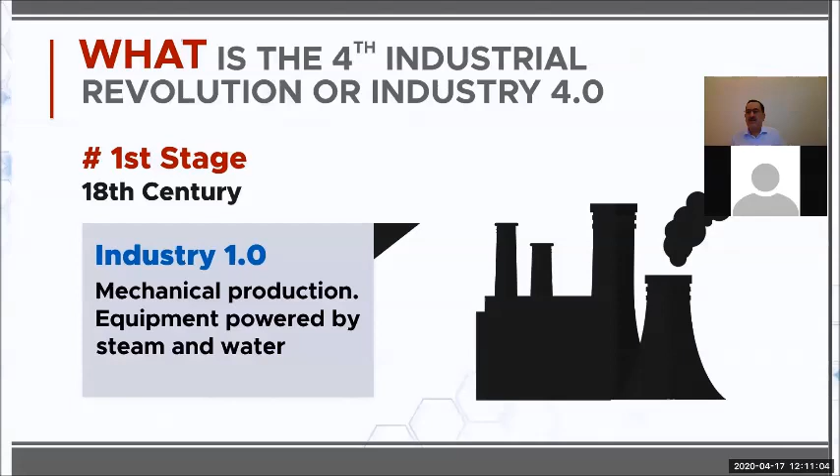The second industrial revolution happened more than 100 years ago, around the turn of the last century. So, this was the revolution which was brought about by electric power, the easy availability of electric power, which led to mushrooming of factories across the countries, first in Europe, then America, and then slowly to other parts of the world, and also led to the invention of such techniques like assembly lines, which was first used extensively by Henry Ford to make automotive manufacturing more efficient and cheaper.

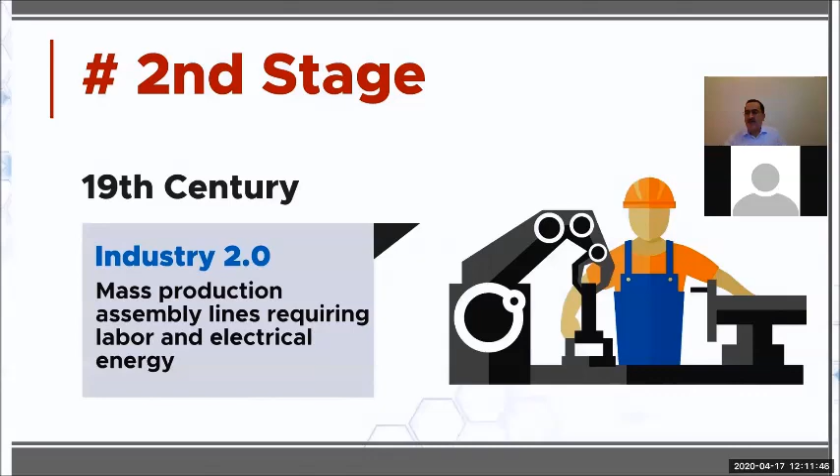The third industrial revolution took place about between 1967 and 1970, when you had a fusion of mechanical engineering technology and electronics. So basically, electronics entered machines in the form of chips, PLCs, simple NC systems, and finally CNC. In 99% of factories of the world, we are still in the third industrial revolution, some variant of that. So if you have a factory in Manesar, which is using 50 machining centers and 5 axis, 7 axis machining, you would say that this is a form of Industry 3.11. By 11, I mean 11th iteration or improvement over the basic thing which emerged in 1970. But it is not Industry 4.

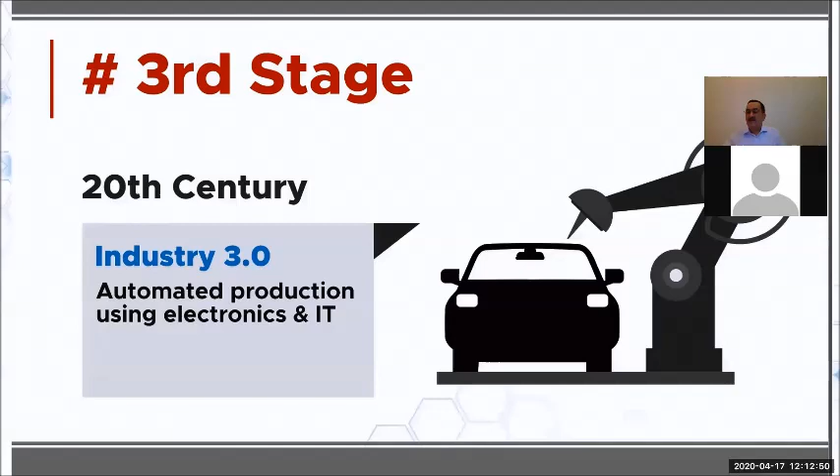Thanks to IoT devices becoming cheaper and more easily available, we were able to now start Industry 4.0, or the fourth industrial revolution. So fourth industrial revolution is basically a combination of machines and IoT devices and cloud-based storage to pick up data seamlessly from factories around the world, take it to the cloud, crunch that data with software, and deliver reports, alerts, and actions, remote actions. So this is an entirely new way of working.

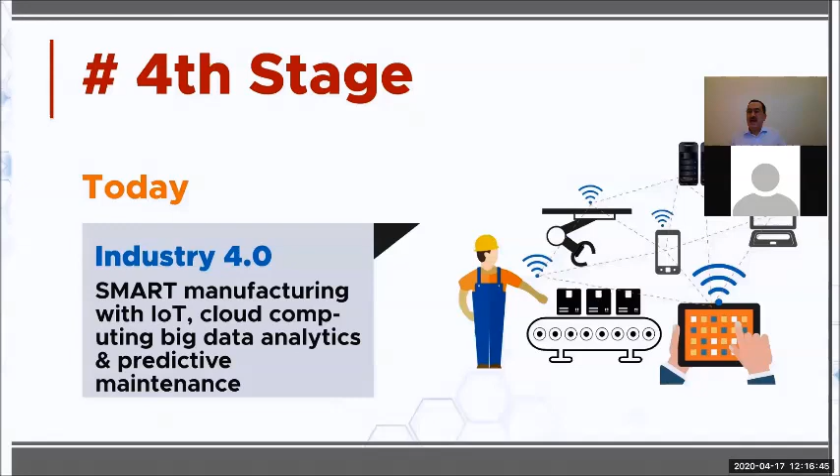So these three reasons are why the fourth industrial revolution has happened, and which is why I want to focus on these topics.

Now, what is a low hanging fruit? You must be thinking, why am I talking about fruits. A low hanging fruit, as you can imagine, you go to an orchard or walk in the forest. There are some fruits which are very high up on trees. It's very difficult to reach them, you can get hurt, and maybe you reach that fruit and find it's not ripe, so all that effort is wasted.

In comparison, a low hanging fruit is one you can just raise your arm and pluck, like an apple from a tree, and enjoy it. So when we think about business, a low hanging fruit means technologies which are easily accessible, affordable, and implementable without experts.

One of the most important criteria for success of any initiative in industry is that you should be able to do it yourself. You should not need very highly skilled people inside your company, or experts from outside coming to give you advice. So this is the basic meaning of low hanging fruit.

The first low hanging fruit is something I call UMM, Universal Machine Monitoring. What is the meaning of universal machine monitoring? Universal means something applicable to everything. So this technology is applicable to all kinds of machines: CNC, non-CNC, turning centers, drilling machines, forging machines, presses, anything, any kind of machine tool.

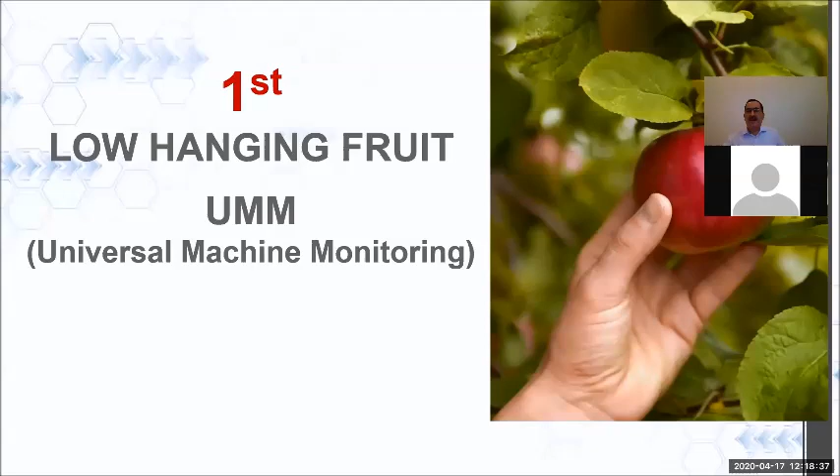Now, the core technology behind UMM is cloud-based. It depends on a black box which is plugged into a machine, and it picks up the data from the machine and sends it to the cloud. It's a secure cloud, there's absolutely no risk. The software sits in the cloud, crunches this data, and delivers it to the stakeholders in the factory.

Two kinds of information are delivered: one is called alerts, which come to the people on the shop floor. The second is called reports, which is something periodic, meaning hourly, shift by shift, or daily.

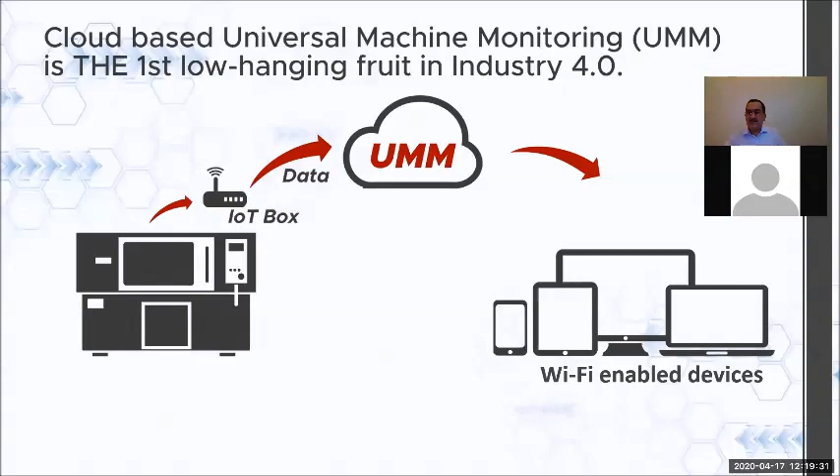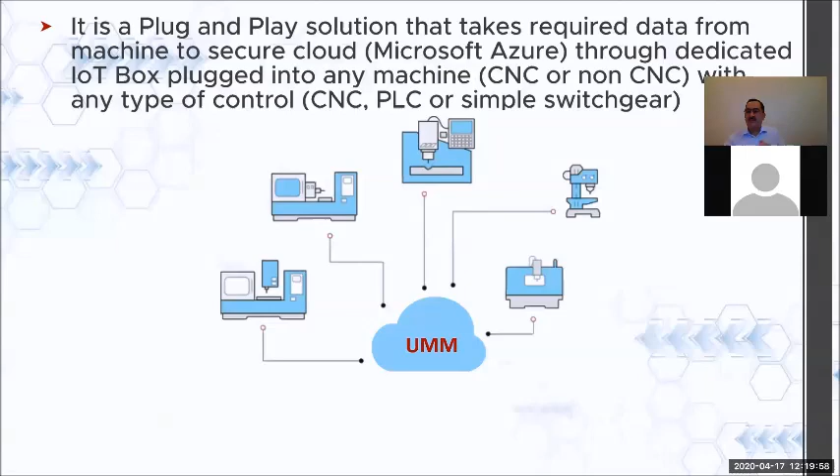Now, this is a plug and play solution which does not need any IT infrastructure. You don't need LAN cables, servers, UPS, or any of those things. As you can see from this graphic, all kinds of machines, your old lathes, drilling machines, welding machines, bar cutting machines, anything can be fitted to this network.

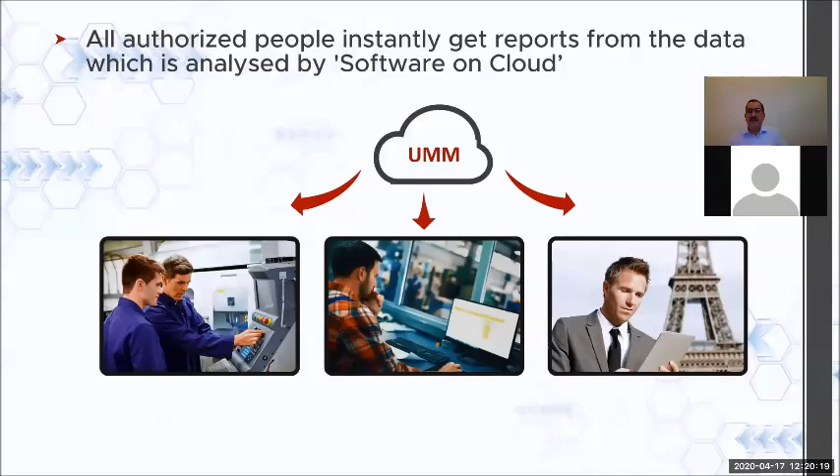The data crunched about the performance of the machines is available to people on the shop floor, to your managers sitting in their cabins, and also to your plant head or MD who may be somewhere else in the world. Even if he's out of the country, he can access that data in real time.

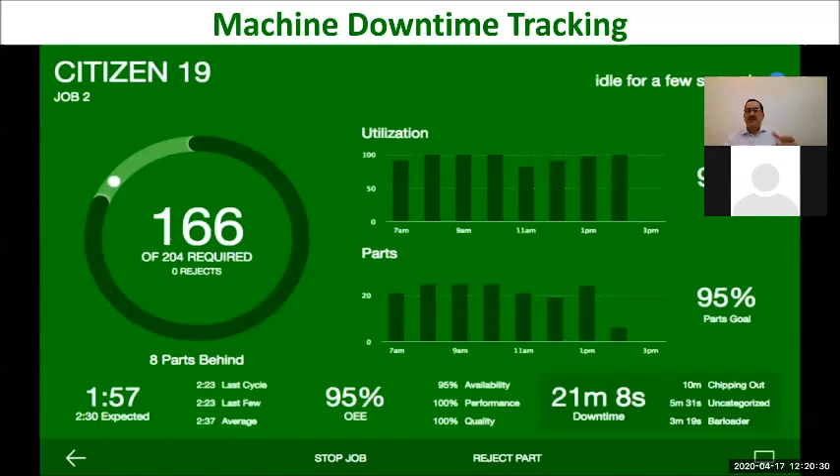Now, these are some examples of reports you can see, including downtime tracking: how long the machine has been working, when it stopped, how long it stopped, and why it stopped. You can also have screens with alerts. So if you have a machine shop with 100 machines, you can install screens in the cabins of supervisors where they can see the data coming in real time.

They can know which machines have been down, for how long they have been down, so that they can monitor and make things efficient in real time. The most important reason for having UMM is to monitor the productivity of the machine.

The measure of productivity is something called OEE, overall equipment efficiency. Overall equipment efficiency depends on the availability of the machine, which means the machine should not be down because of tool change, job change, power cut, or maintenance.

It also depends on P, the performance of the operator—that okay, machine is available, but the operator is not loading fast enough, or in between he is stopping and chatting with somebody, or he has gone for a lunch break of 30 minutes, but comes after 40 minutes.

Or 15 or 20 minutes before the end of the shift, he switches off the machine. So all this, as you can see from this graphic, is recorded in more than 24 types of reports. It's your choice what you want to see. And seeing these reports, you can know which machines are creating maximum problems in terms of poor performance.

Which you get with the help of these reports. So the second low-hanging fruit is called PDM, or predictive maintenance. This is a very, very powerful technology. It is still in its infancy, which means it is still undergoing a lot of development, as is the case with a lot of other Industry 4.0 technologies.

They are all evolving. It's not like a finished package. It is something which is available now in a certain version with certain features, and then these get evolved further.

Now, all of us are familiar with two types of maintenance. The first original type of maintenance we are all familiar with, ever since gadgets, appliances, or automobiles started coming into our lives, is breakdown maintenance.

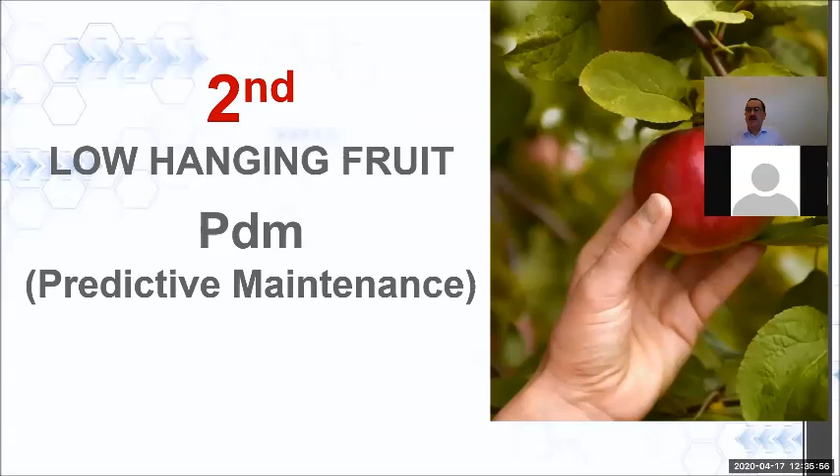So we now have this new technology, an Industry 4.0 technology called predictive maintenance, or PDM. PDM is based on a principle, a very old saying we have heard in school. It's a many-hundred-year-old saying: a stitch in time saves nine. So basically, if you catch the mistake very early, when it has barely started, you can save a lot of cost.

See, even in the medical field, this is what is being attempted in the case of COVID also, that you try to catch the first few infected people, isolate them and treat them, and not let them mingle with the population so that it does not spread.

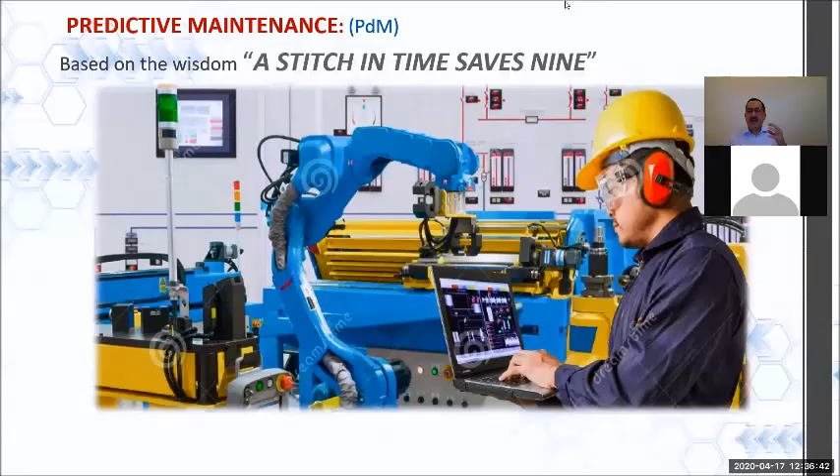So in this case, in case of PDM, we use symptoms of potential problems to come to conclusions that yes, the spindle of this machine can fail in a couple of months because the vibration level is rising beyond normal. So examine this today, set it right so that it does not fail.

So these symptoms of different types—temperature, pressure, vibration—are extracted from the machine. These are analyzed by a system. Now that's the second principle.

They are not sent to Mr. Sharma, Mr. Verma, or Mr. Kapoor, because when humans come into the picture, they have other responsibilities, other constraints. They may be overworked, they may have other assignments. So even if they get a report that vibration is high, they may just say, okay, we'll see it later.

So the system takes it to the cloud, where you have the analytical engine which reads all these symptoms and then gives directions to particular designated people. For example, Sunil Kumar is the maintenance in charge of certain lines in a factory. So Sunil Kumar will get a message from the system that there's a vibration issue in machine number 31, spindle vibration issue. Please attend to it and report the reasons and actions taken.

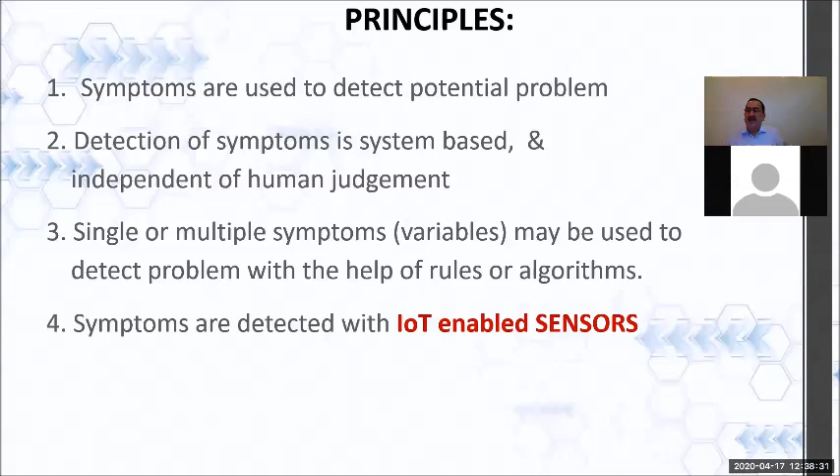So this is an autonomous system, and it checks multiple symptoms, as I mentioned earlier: temperature, pressure, force, pH, vibrations, and a combination of these to arrive at the disease—what this disease could be. And these symptoms are detected with IoT enabled sensors.

Now, there are two types of sensors from which data is taken. The first type are internal sensors. All machines, at least the newer generation machines, have many sensors implanted in them. For example, a temperature sensor. I'll give a small example.

If you are using a CNC machine, let's say specifically a VMC. Now, a VMC has 3-axis motors. Normally speaking, all these 3-axis motors should be having the appropriate current at any moment of time in the operation. The current drawn by the motor should not heat it more than 10 degrees over the ambient temperature.

So it should not heat it more than 10 degrees above the ambient temperature. Now, suppose you have a motor. Let's start this way: you have the ambient temperature of your shop floor at 40 degrees, which means your motor should not be operating at more than 50 degrees. Now, the motor is actually operating at 60 degrees.

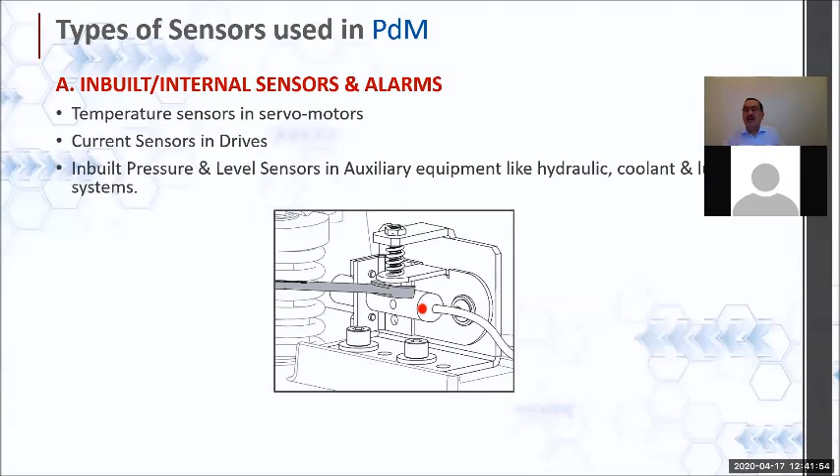Once the person goes, he can check whether there is misalignment, whether an accident happened that wasn't reported, or whether oil is missing, or something else. So this is a very effective way of using data from internal sensors to take necessary action and predict what can go wrong.

The second type of sensors are called external sensors. These are sensors which are additionally put on the machine so that more data about different kinds of conditions can be extracted. These include vibration sensors, temperature sensors, pressure, and pH sensors.

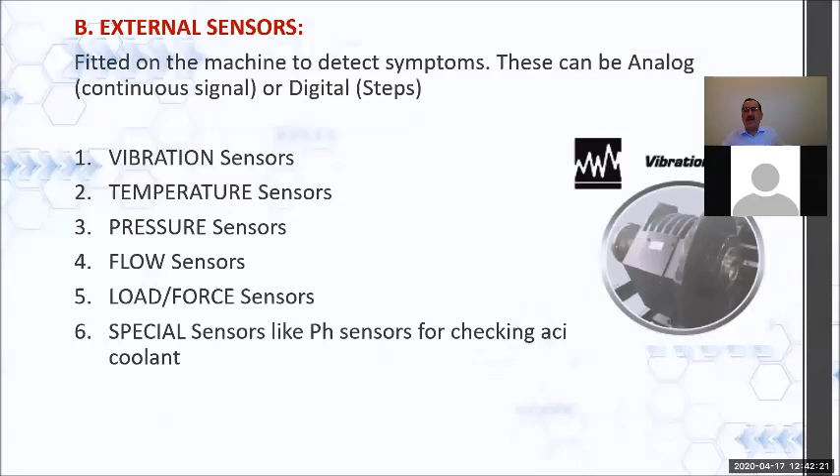So the combination of internal and external sensors is used to extract and analyze data in real time without any human intervention. Now, after this data is analyzed, there are three types of actions which this system can take.

The first is called alerts. The system can send an alert to a designated person — you have fed the names of the designated people into the system, so the system knows, okay, Ravi Kumar has to be informed in case of so-and-so thing.

So Ravi Kumar gets an alert that the temperature of the X-axis servo motor is more than it should be. He goes and sees and finds out the reason, and then writes it in the system that this action was taken. Unless he writes it in the system, it will not close the inquiry or report. So this is the first type of action.

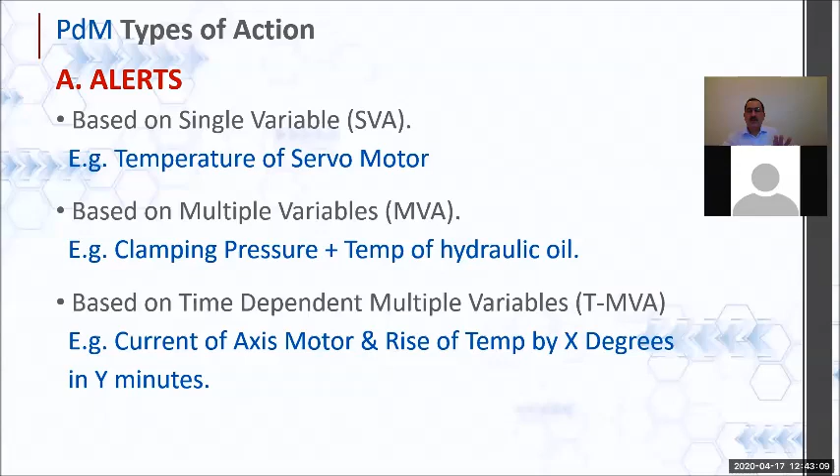The second type of action is very, very important — it's called insight. Now this is a very deep thing. Insight is something which the system provides to you, which you, humans, on your own cannot know. I'll give you an example.

Ram Prasad, the operator, makes a mistake in the night shift and there is a crash of the system. Normally there is no way you would know, unless that crash is so severe that the machine cannot operate, or the signs are very clear — some doors are broken, everything is misaligned. It does not normally happen that way.

Before I proceed further, let me share one statistic, because I've been a machine builder for 35 years now, and I belong to a family that has been building machines since 1961. So we know what machines are and what happens.

See, most machines in Indian machine shops, of any make, from Mori Seiki to Marshall, will have a first life — meaning after that you need major overhauling — of only 50% of the designed life, often less than 50%. The reason is these small and medium accidents which take place all the time.

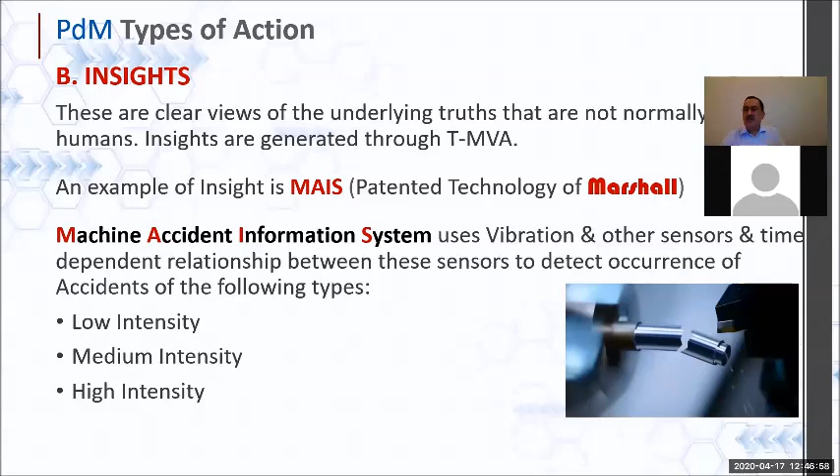So spend more time thinking before you give a program correction or you set a new job or things like that. So this is the second action taken by the system under predictive maintenance. The third type of action is called autonomous action. Now, there are some things which happen so fast that no human being has time to react. This is where the system comes in and stops things and prevents a serious accident from taking place.

I'll give an example. Imagine a job has been loaded and, the moment the cycle start is switched on, there is a sudden loss in clamping pressure because of some reason. Now, there is no way an alert can go and a person can stop the machine. There's no way. It is going to happen in 0.5 seconds.

Now here, the system detects that the spindle has started. It also detects that at this time, the pressure should have been so much, but it has dropped to this. Immediately, it comes to a conclusion that the machine needs to be stopped, and it stops the machine in a fraction of a second. So this is the third type of action, which is called autonomous action.

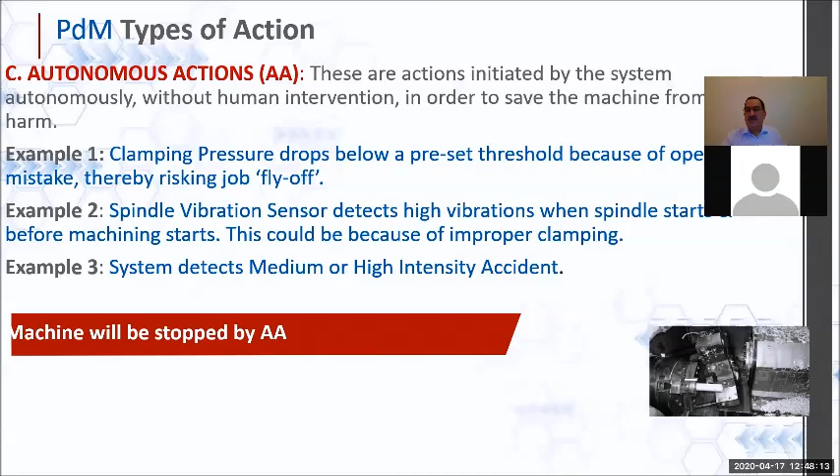Now, before I move to the next third module of this, I will be happy to answer any questions related to predictive maintenance. So now I've come to the final third part of this webinar, which is the third low-hanging fruit. Friends, the earlier two fruits that I talked about are very, very important. But if they are very, very important, this is critical.

Reason, पहला जो fruit है, which is UMM, it is primarily taking care of your productivity, how well you run your machine or your operator runs the machine. The second, PDM, is related to the health of the machine, that it should not suddenly stop. You can live with both these problems, but in today's world, you cannot live with the third problem, which is quality.

Today, if we talk about the automotive industry, because I generally use the example from the automotive field because they are the largest users of machines and they make equipment which is so affordable. A typical car is so affordable today compared to what it was 50 years ago if we see the per capita income. But it is so loaded with technology that these people have to be very efficient and have excellent quality, because you cannot afford even one car in 10 million having a failed shock absorber or braking system on the road. It would lead to so many deaths.

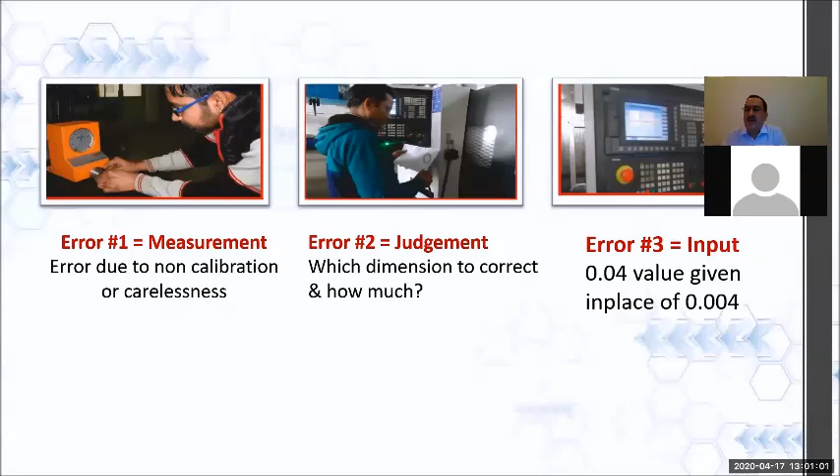And I've already mentioned that companies, the Bosches of the world, today their expectation is much higher than what it was 15 years ago. So today, all these skills which are necessary to be a skilled operator result in errors, which you can see on the screen: measurement error, judgment error, input error. Input error is very common, especially in night shift. People are tired. Correction देनी है आपने 0.004 microns, and you miss out one decimal point position, and you give 0.04, and you have lots of defectives produced.

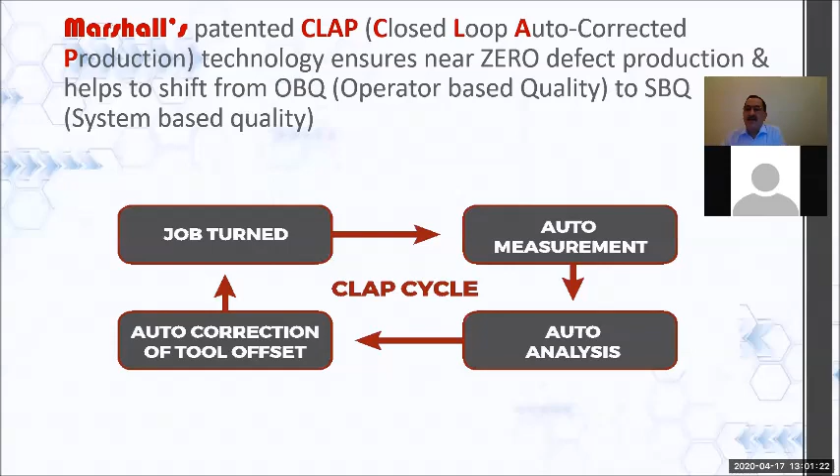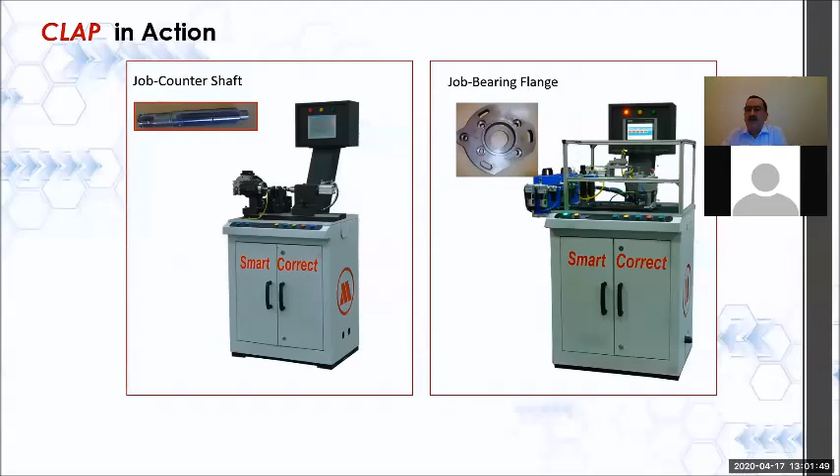So Marshall has come up with a patented technology called CLAP, which means basically that the job is done, it is auto measured, auto analyzed, and auto corrected by something called smart correct gauging stations. So these stations have three modules. One is called inspection module, which is custom designed as per a particular family of jobs. Then you have an analysis module where the computation is done and which then tells the CNC how much to get corrected. And there is an activation module which activates the whole system. So I will now show you a small video clip which will show you some of these gauging stations in action.

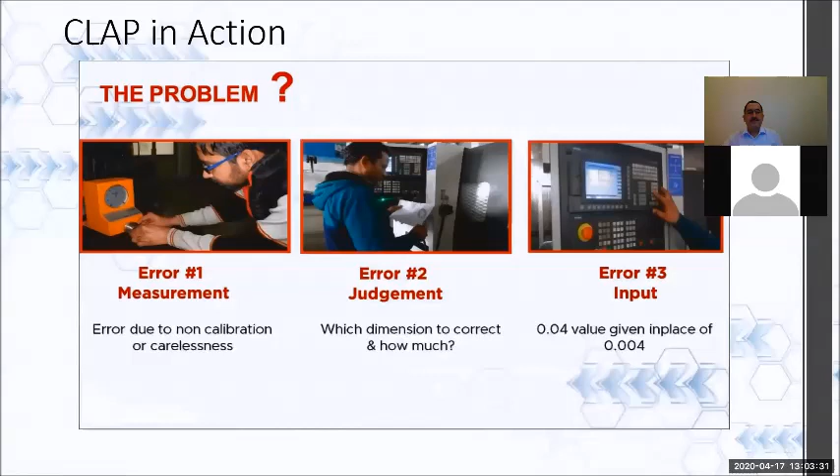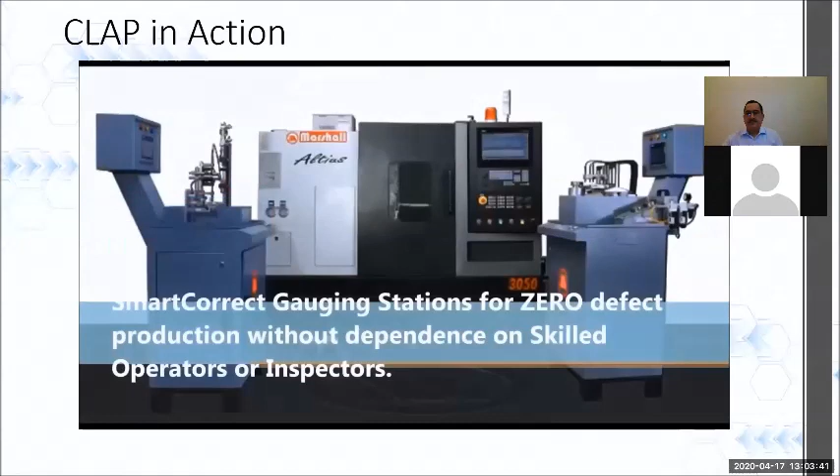Yep, बीच में ना कुछ change ना करो.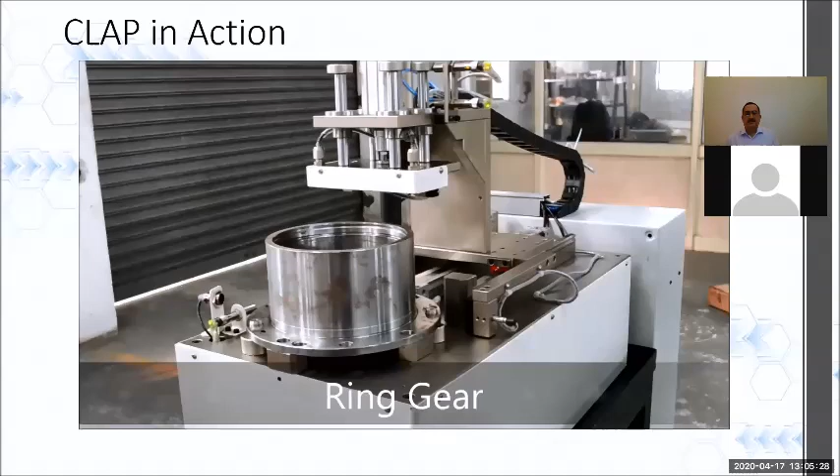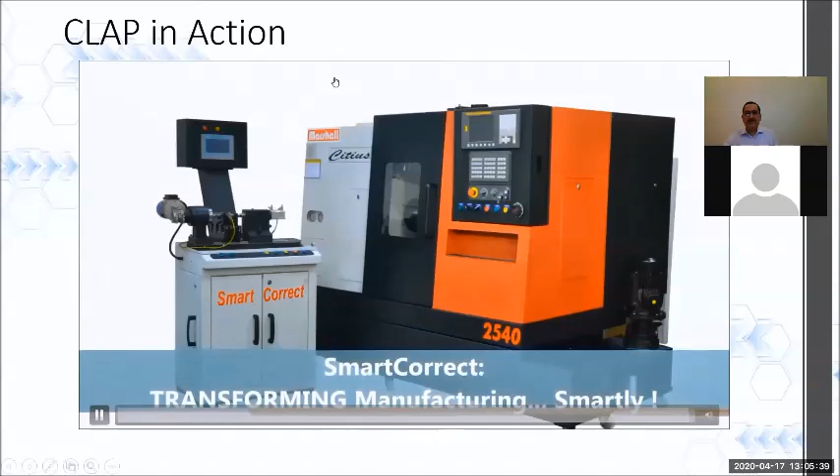So friends, I hope you enjoyed this video. So we come to the last part of our presentation now. So with the help of these three technologies, these three basic building blocks of Industry 4.0, which are the most accessible, affordable, and implementable, so hence which are called the low-hanging fruits, you get three major benefits. You have lower cost per component, quick return on investment of all the machines or infrastructure that you put up. And you are also able to achieve near zero defect quality, which when you combine all these three together are a very, very powerful way in making you more competitive and profitable.

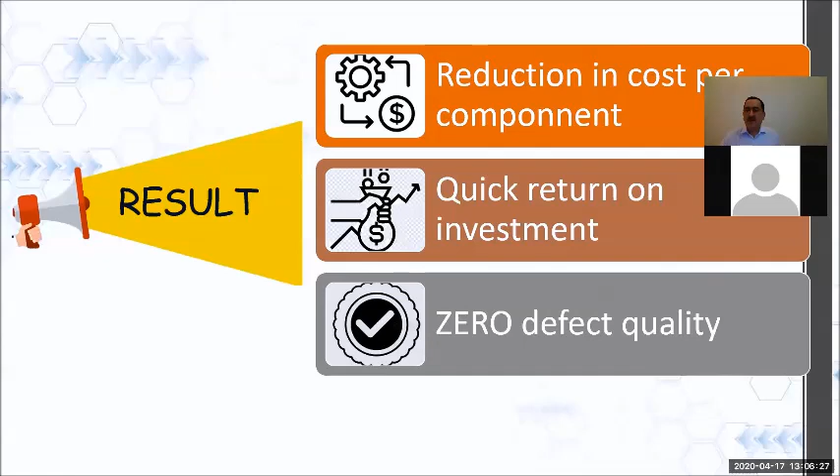The coronavirus is going to hit the world very, very hard. I didn't want to talk about corona, but it is inescapable. You are going to have to operate your factories with much less number of people, at least much less skilled people. You will be forced to have intense competition because the overall demand may come down for some time. But the most hopeful thing, positive thing, which I'd like to express is that the world is going to bounce back. The world is going to bounce back.

And in this new changed world, you will be benefited greatly if you use this time to dump the old rotten past. अगर कोई खराब practices हैं, over dependence on people, outdated technologies, throw them out. You may not be able to throw them out in one shot, but start the process, start pilot projects. Everybody can afford a pilot project. It can be of any scale. You can start with one line, one machine. Do baselining, see before and after. You will see a huge change. And then you will realize how we were working.

I have a simple formula. If today you are earning net profit of X%, let's say 6%, then simple thumb rule is that 12% is going down the drain. Double of what you are earning is going down the drain. That is easily stoppable loss, which can be converted from loss into profit. So in the next two webinars, we are going to explain how you can now implement these things and enjoy the fruits of Industry 4.0.